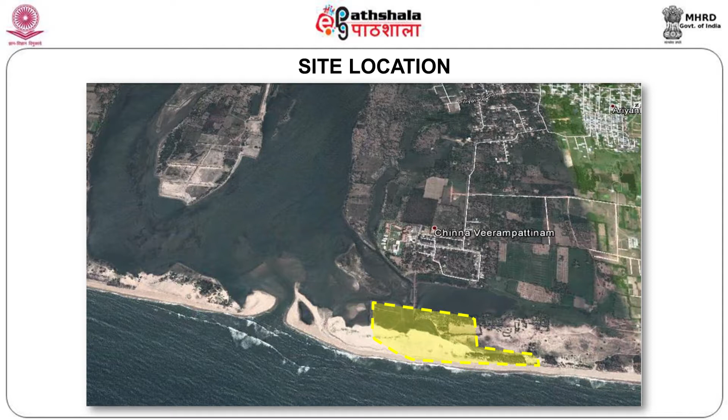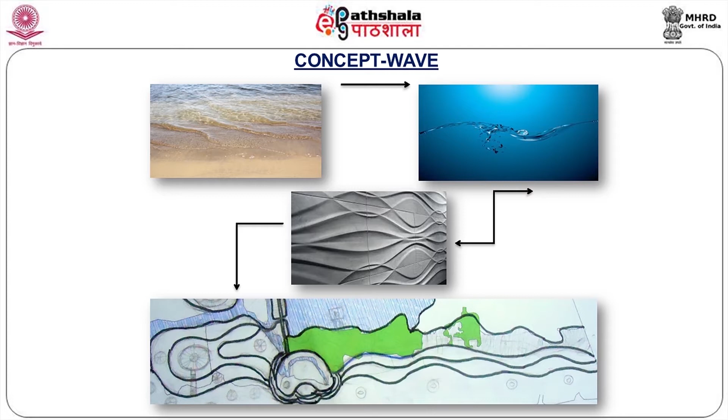We have taken the concept of a wave, how the wave forms. You can see from the sea these waves are there. So these waves have been taken as a concept in designing this urban space. Proposed elements include parking lots, toilets, boat jetties, walkway. The boat jetty is created on the shallow area where water comes inside as a backwater, so you'll have still water available without the disturbance of a wave.

Then entrance archway, sunken garden, entrance plaza, campfire location, where the French style is different. So we have to cater to the local environment, local people, the usage of places - pergolas, tree houses, pavilions, restaurant, stone pillars, broken pillars, sculptures, bund, treetop walking, service jetty, board walking, rock boulders. These are the basic elements we are trying to use in this particular site.

We have come out with the material plan: locally available mud bricks, natural stones, bamboo, and timber are used here. So how are we going?

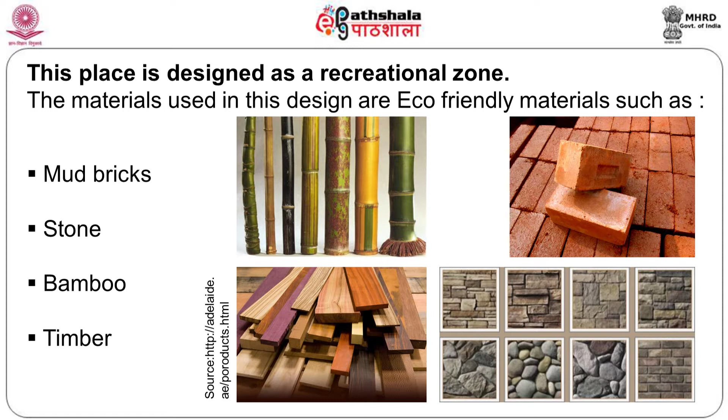Then we have the site location and site design - meadows and lawns, sunken garden, water walk, boardwalking, gazebos. Coconut groves, as you see in the picture, are retained. There is a boat jetty on the shallow area, and a connecting bridge from this side to the north to south.

You have a pavilion where people can stand and watch. There is a sculpture court where the artist can express their feeling and create a sculpture. Then you have a restaurant for eat-outs, group dining and personal dining. All different kinds of activities are being created here so that the entire beach is used properly by the people.

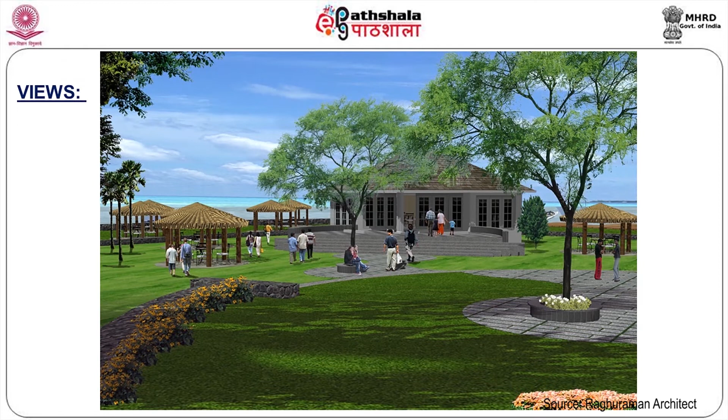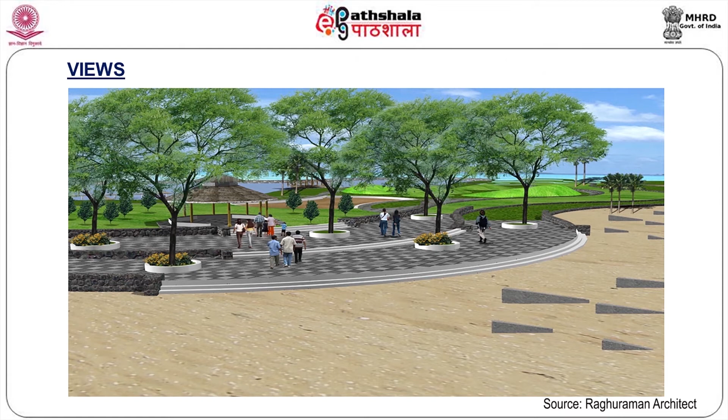With an urban setting, you can see some of the designs - restaurants, gazebos with local material, tree seating, treetop seatings. All these things are provided here with a lawn, different types of walkways, pergola walk connecting both the sides. And this is some of the views you can see.

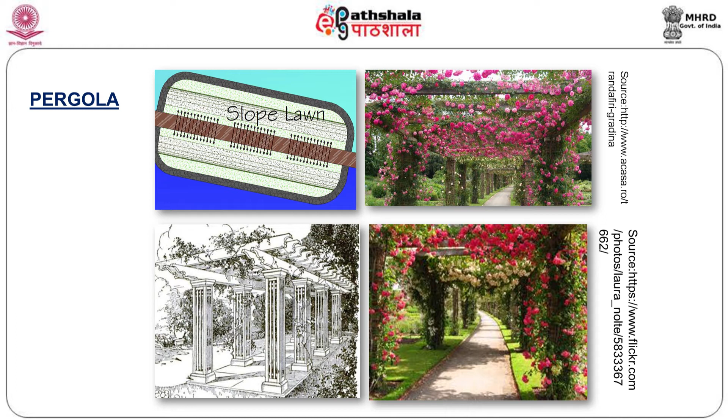So a slope lawn has been created with the pergolas, with flowering trees and different flowering plants used. These plants are again salt resistant plants like bougainvilleas. Then the boat jetty - how it is used in shallow water.

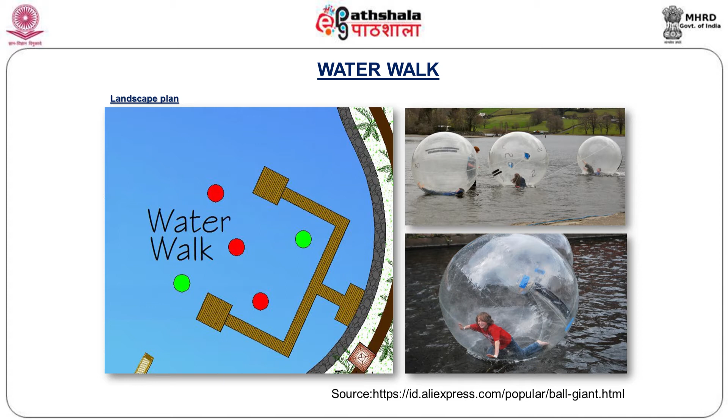Then people are using inside the balloon walking. These are the kind of recreation we require for the urban setting. The sunken garden can be used as a bonfire area as well as a gathering space or for some cultural events.

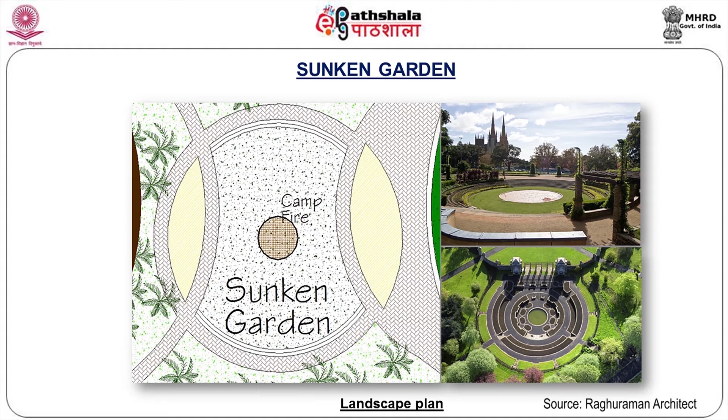Everything can happen here. We have made out different levels of lawns. People can climb up and climb down. Children will enjoy this area.

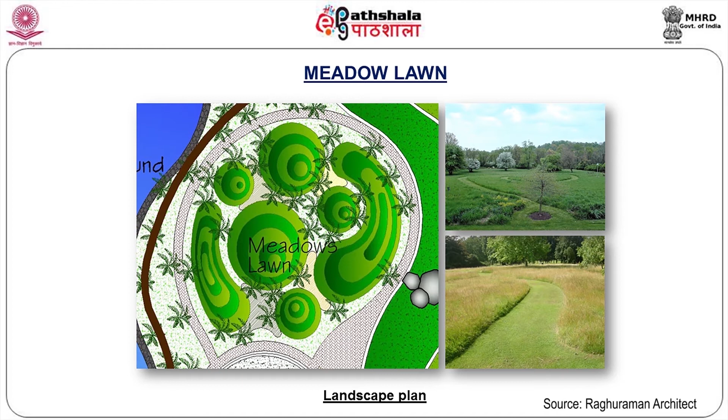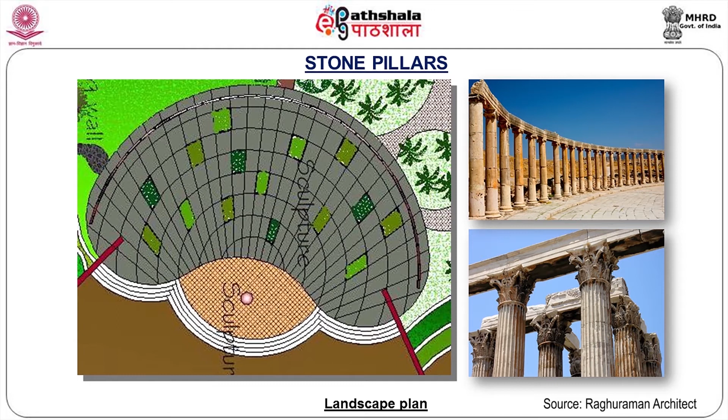Tree huts - people can climb up and stay there or watch, take a lunch. Any break can happen over there. Then pillared halls, restaurant, all made from locally made material.

Again, Chinna Virapatnam phase 2, zone 2, we are talking now. So again in this zone, we would like to use a free flowing flow. We have this local water coming inside and going out - it gets a free flowing flow of water. So that concept has been taken here.

Here again, we have visitor centers, toilets, entrance plaza, boat jetty. A bund is created to protect the water. Rock boulders are used. There's a children's play area, toddler car track - so you have kids catered for there.

So you need activity - cycle track, dancing floor in order to match with the French culture. Rain dance, a trampoline - people can jump and throw away all their fears.

BBQ pits - what is BBQ pits? Barbecue pits are used there. Food courts are there, sand pit, chessboard for people to understand the different scale of chessboard. You need not play chess, but people can stand there and take a photograph.

These are all photo points for them. Snake and ladder games, maze garden, rope climbing, walkways, viewpoints. All these activities will improve the urban setting, plus these gardens will be used by the city.

So again, different materials are used in how the design is happening - play areas, rain dancing area, toddler car track, trampoline, sandpit, chessboard, and a maze where you can go inside and get lost.

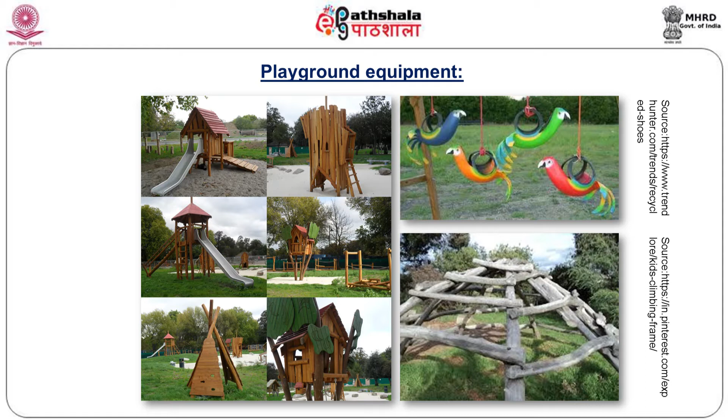These are playground equipment. You need not do the same old grind, the same old slides - you can think in terms of something different here. Different materials are used, different forms are created to have a very interesting play area.

Old tires have been brought up and hung, so people can climb over with sand below them. They need not get hurt.

These are all different play equipment ideas: toddler car track, cycle track, rain dancing areas, dancing floors, sandpit, and a life-size chessboard where people can really stand and take a photograph. A snake and ladder game can also be played by the kids.

Whatever urban design we are talking about, these things will add life to urban people. Kids are our future, so we have to create an atmosphere where they play and stand there. If a snake bites, they come down to a different level; they stand near the ladder, climb, and go up to a different level.

These are all fun games. This is the maze again, you can go inside and get lost. There's also rope climbing.

BBQ, barbecue pits are there, so people can have their own barbecue. The sea is near, so they can get fish, and local fishermen will give them fresh fish which they can cook and eat.

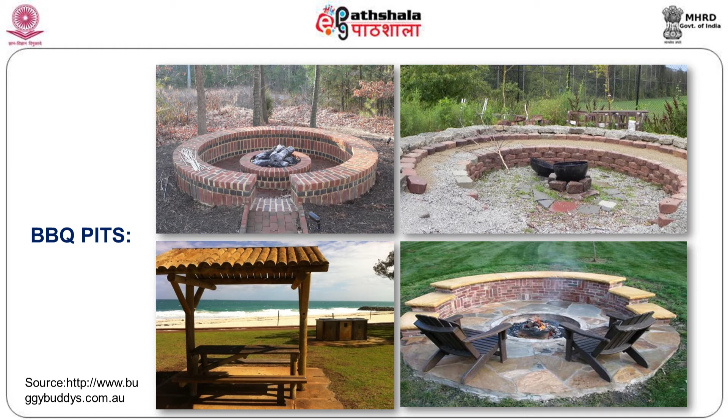There's a trampoline and walkways. When I saw this walkway, it was very interesting, reminding me of the pancake rocks in New Zealand.

These kinds of things have been conserved by them on the seashore, these pancake rocks, you can see it on Google. How did they manage to conserve the pancake rocks? Such a wonderful thing to be maintained, and we also need to be aware of what is to be maintained and how it should be given to the public. All these things we have to learn from them.

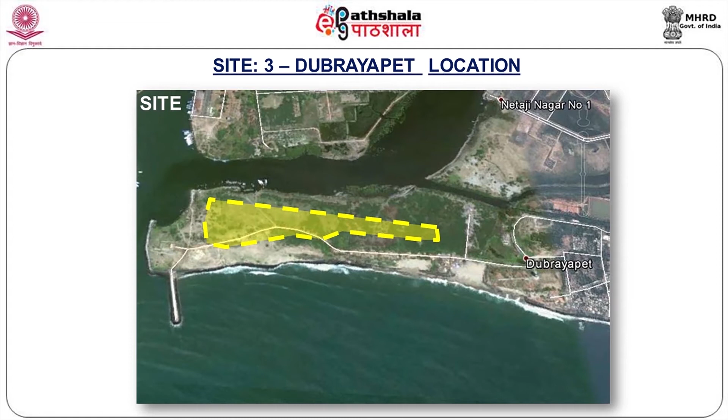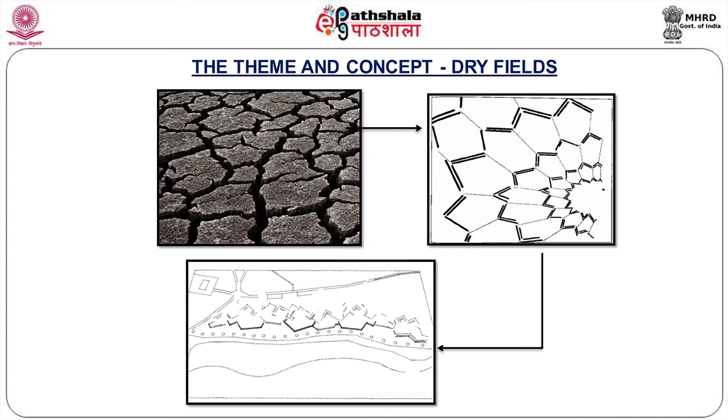Then for the Dubrayapet location, this is the third site we are talking about. Here the theme is a dry area, with dry fields. You can see the broken thing, so the same concept is used in developing this particular pitch, using tensile roofing, wood, and stone materials.

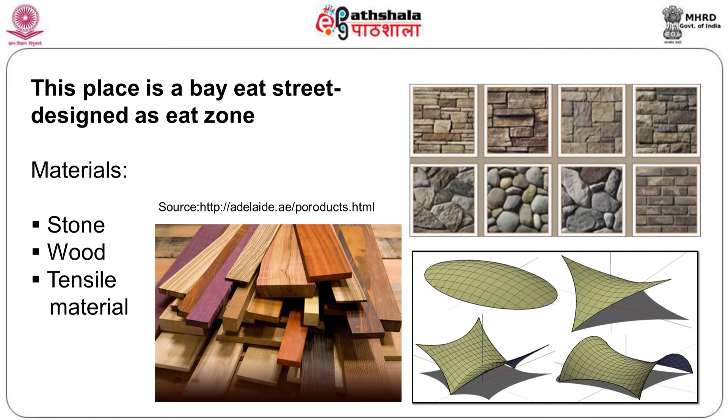The proposed elements include parking, toilet, entrance plaza, food court, bund, open dining, tensile roofing, tensile umbrella, service road, and lounge. This is the concept of how you have designed this.

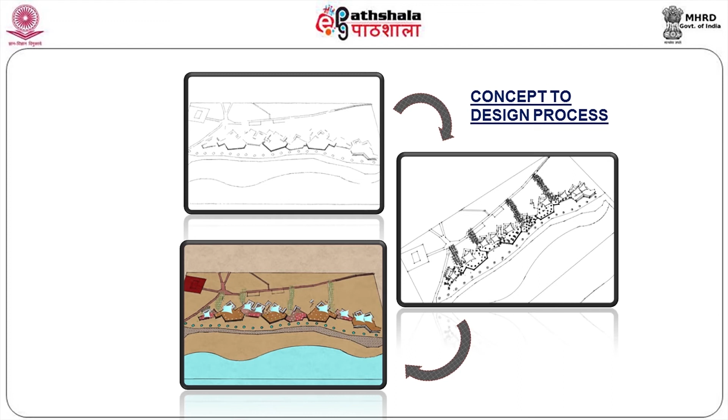All these things, once they ultimately come up, will improve the urban character of Pondicherry. So you have different locations in the plan, with tensile roofings provided, and Casuarina groves created.

Queen's palms are created, a food court is created, and a parking lot is created for people to park and use the spaces. You have open dining with tensile umbrellas available.

You have a food court, how does it work? The entire area is basically an eating space, with French, Italian, Japanese, Mexican, Indian, continental, and Chinese food items sold here, so people can come and enjoy different types of food.

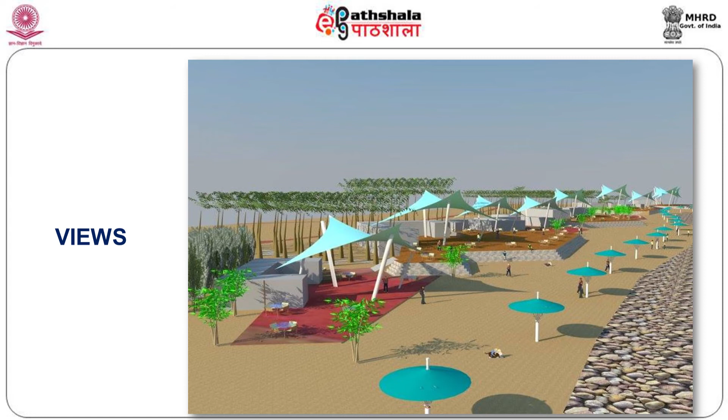So ultimately, this is what it is going to look like when you design and execute it, with the tensile roofing and built-up areas, the Casuarina groves, and Queen Palms.

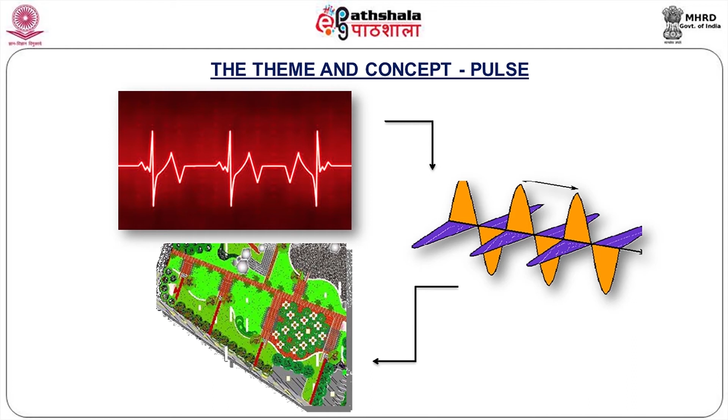Here again, we are trying to create a Casuarina grove, viewing towers, outdoor dining, galleries, parking, restaurant, lifeguard station, toilets or washrooms, and green rooms, because we are going to have a performance stage available here so people can have a stage and do their performance.

You have Casuarina groves created, and you can walk inside the grove and enjoy the improved microclimate, because Casuarina leaves take water and oxygen from the atmosphere itself, giving off that chillness for you.

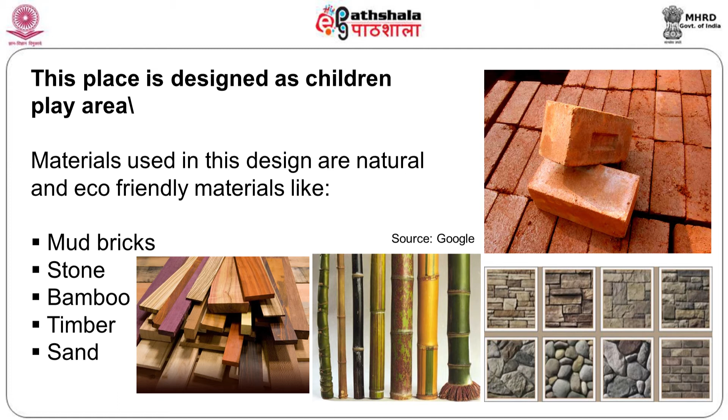You have viewing towers, a gallery, restaurant, kitchen, outdoor dining, parking, an amphitheater, lifeguard, green room, and toilet -- almost all the facilities are available. It's all designed so that people will think of this as part of the city and enjoy these spaces.

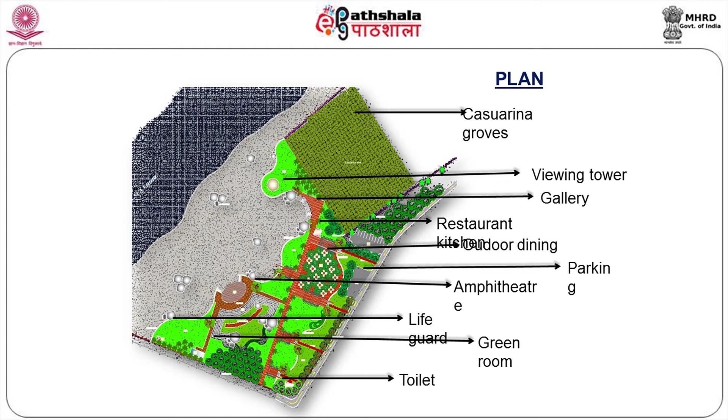You have a pergola walk and a wooden deck for the amphitheater, for people to sit and watch cultural performances. Somebody can stand on the stage and start playing guitar. These are the viewing towers.

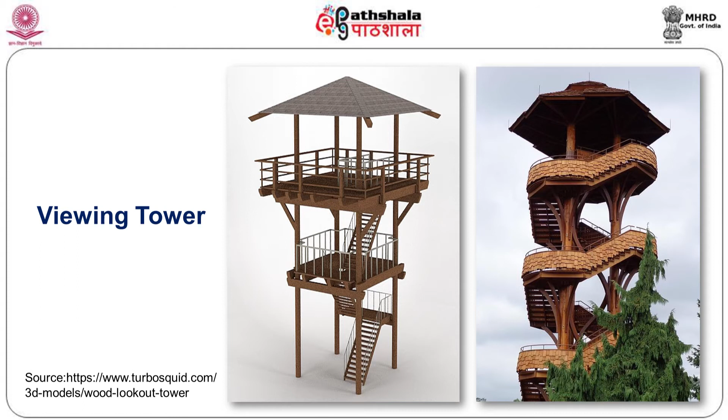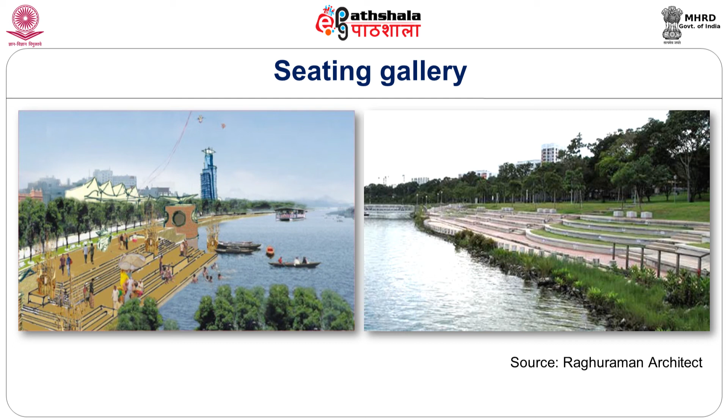These are the kind of seating galleries we can create. People can really sit and enjoy. You need not run around the beach. You can also sit and watch the sea. Restaurant with outdoor dining, lots of trees available, so use them with good furniture and good landscaping.

Amphitheater - you have laser shows, you have a singer. There are lots of possibilities for you to create an urban setting. We are talking about beach development in the urban scenario.

What is required in an urban scenario? We have to analyze it properly. Number one, you need a space to be used only in the evenings or early mornings. Daytime you anyhow cannot use this because of the heat. Maybe you can create some shelter, but still using the beach at 12 or 1 o'clock is very difficult in the Indian context. So your major usage is only in the evening time.

In the evening time, our beaches are on the eastern side, so you really don't get much sunlight. Then you can have a shaded area also available, plus a lawn is available, sand is available - you have everything available for you to make it a usable space.

What is usable space? Just sitting and watching, climbing up the viewing towers, walking into the Casuarina groves, listening to the song, walking under a promenade or pergolas or under the gazebos, just strolling around. But for all these things, you need a designed space.

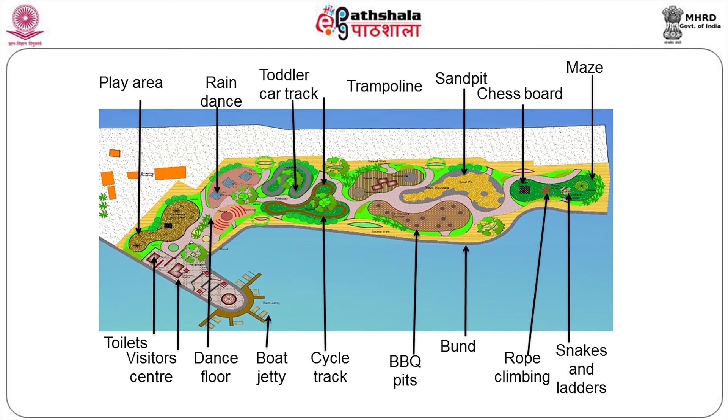Then we are talking about boardwalking. I was talking about pancake islands - these pancakes are limestones actually. They have been there for 2000 years or something like that. It's in New Zealand, where they preserved these things and showcase them to the public to help people understand what is there.

We are talking about BBQ, barbecue pits. So you have a sea nearby, you have a fisherman community there. Creating all these things will help them generate their own funds - the fisherman community will give you the fish and you can cook them and enjoy the fish.

Number two is your trampoline - you have different equipment available. Larger trampolines where elders can jump, smaller ones only for kids. These are all elements where your recreation space is used fully to its total potential.

Rope climbing or maze gardens, snake and ladders, chessboard, rope climbing, sandpits - where children can create their own sand sculptures. This is very important to understand, and is mainly important for having an urban outing.

We are talking about urban landscaping - what is urban? Have all these elements for the people to use ultimately. As I was discussing in detail about the design aspect of 5 or 6 beaches, once these beaches are developed with this kind of design input, you will really see a total change in the urban landscaping pattern of the beaches, or the usage pattern of the beaches.